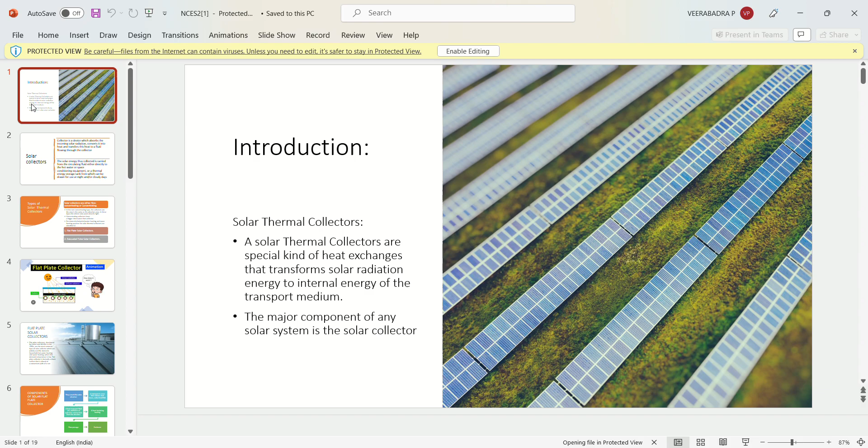Introduction about solar thermal collectors. Solar thermal collectors are special kind of heat exchangers that transform solar radiation energy to internal energy of the transport medium. The major component of any solar system is the solar collector. A collector is a device which absorbs the incoming solar radiation and converts it into heat, transferring this heat to a fluid flowing through the collectors. The solar energy thus collected is carried from the circulating fluid either directly to the hot water or space conditioning equipment, or to a thermal energy storage tank from which it can be drawn for use at night or on cloudy days.

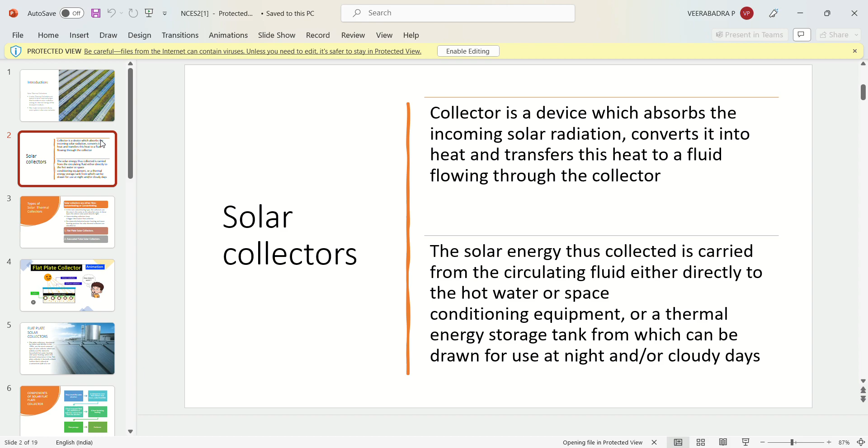Types of solar thermal collectors. Solar collectors are either non-concentrating or concentrating. In the non-concentrating type, the collector area is the same as the absorber area. In these types, the whole solar panel absorbs light.

Concentrating collectors have a bigger interceptor than collector area. For domestic or industrial water heating and space heating purposes, solar thermal collectors are classified as flat plate solar collectors and evacuated tube solar collectors.

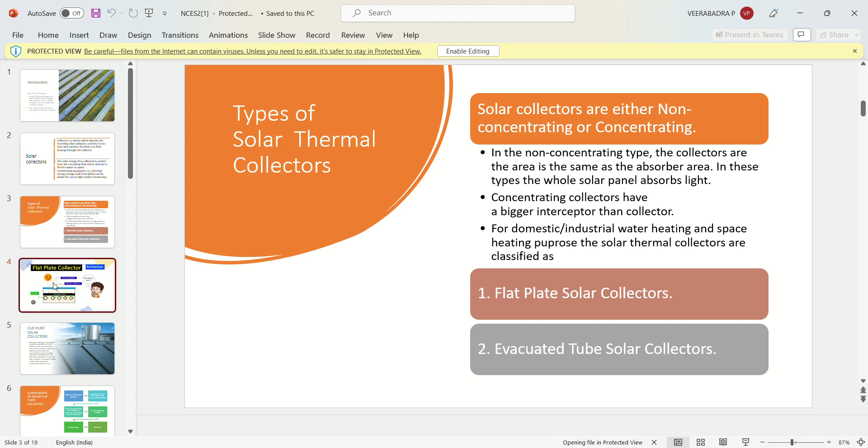We can see the flat plate collectors and how they work. They absorb the radiations, both direct radiations and diffuse radiations. We can see the tubes, absorber plates and tubes.

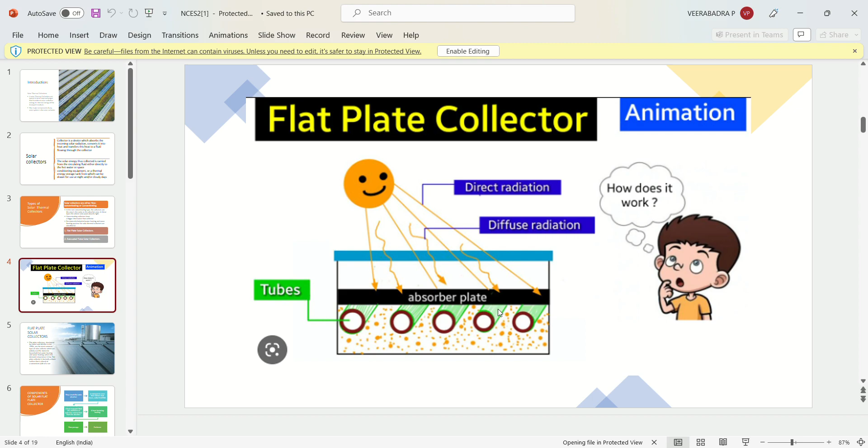Flat plate solar collectors, developed by Hottel and Whillier in the 1950s, are the most common type of solar collector, widely used for domestic household hot water heating and space heating where the demand temperature is low. A flat plate collector is basically a black surface that is placed in the convenient path of the sun.

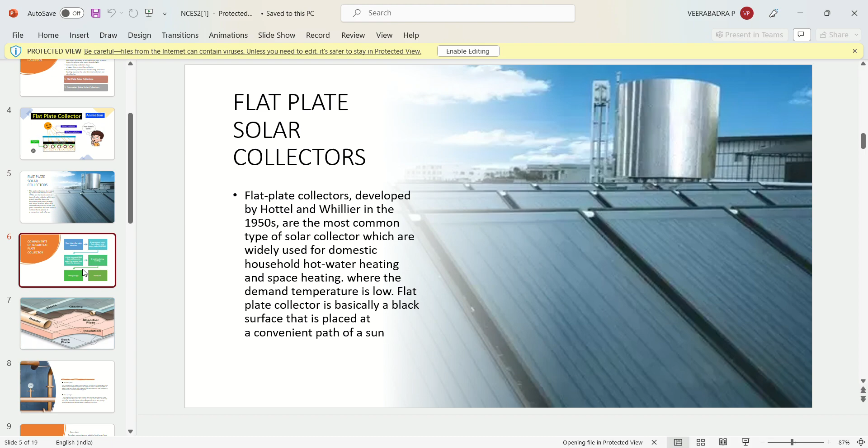Components of solar flat plate collectors: a dark flat plate absorber, a transparent cover that reduces heat loss called glazing, a heat transport fluid (air, antifreeze, or water) to remove heat from the absorber, heat insulating backing, and flow passage enclosure.

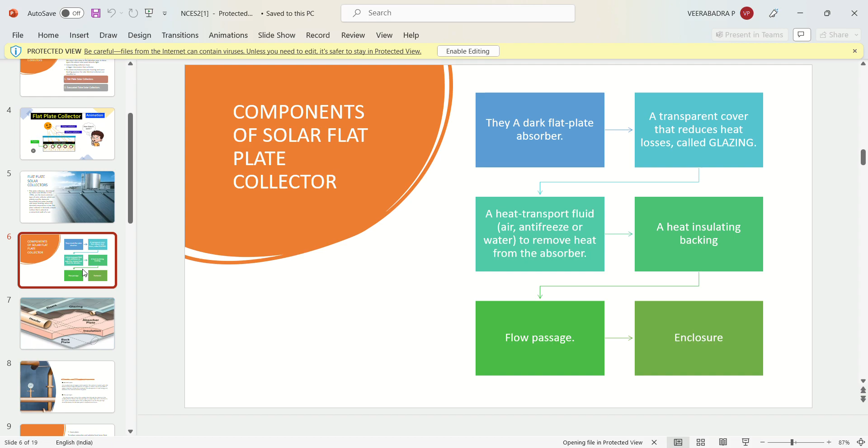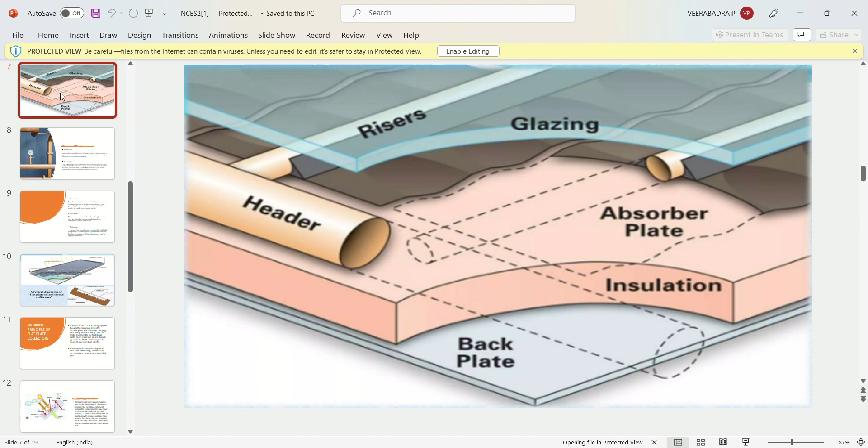Absorber plate: it is usually made of copper, steel, or plastic. The surface is covered with flat black material of high absorbance. If copper or steel is used, it is possible to apply a selective coating that maximizes the absorption of solar energy and minimizes the radiation emitted by the plate.

Flow passages conduct the working fluid throughout the collectors. If the working fluid is a liquid, the flow passage is usually a tube that is attached to or is a part of the absorber plate. If the working fluid is air, the flow passage should be below the absorber plate to minimize heat losses.

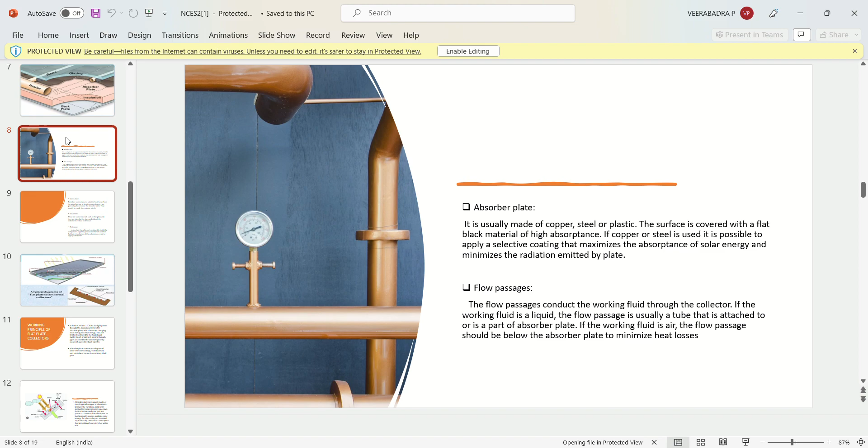Cover plate reduces convective and radiative heat losses from the absorber. One or two transparent covers are generally placed above the absorber plate, usually made from glass or plastic. Insulation materials such as fiberglass are placed at the back and sides of the collector to reduce heat losses. The enclosure is a box in which the collector is enclosed; it holds the components together, protects them from weather, and facilitates installation of the collector on a roof or appropriate frame.

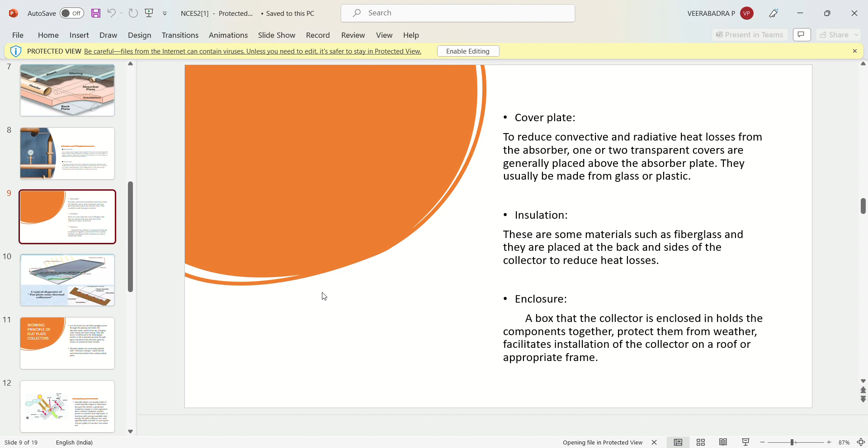The working principle of flat plate collectors: sunlight passes through the glazing and strikes the absorber plate, which heats up, changing solar energy into heat energy. The heat is then transferred to the fluid - liquid, water, oil, or gas - passing through pipes attached to the absorber plate by means of convective heat transfer.

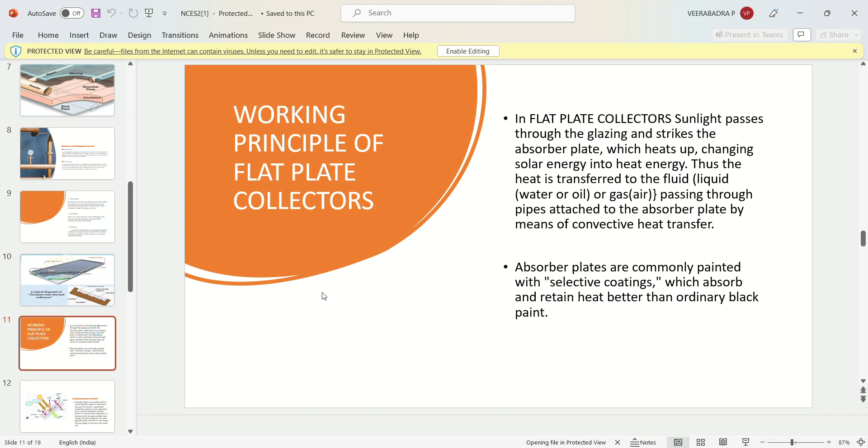Absorber plates are commonly painted with a selective coating which absorbs and retains heat better than ordinary black paint. They are usually made of metal, typically copper or aluminum, because metal is a good heat conductor. Copper is more expensive, but it is a better conductor and less prone to corrosion than aluminum. In locations with average available solar energy, flat plate collectors are sized approximately 1/2 to 1 square foot per gallon of one day's hot water use.

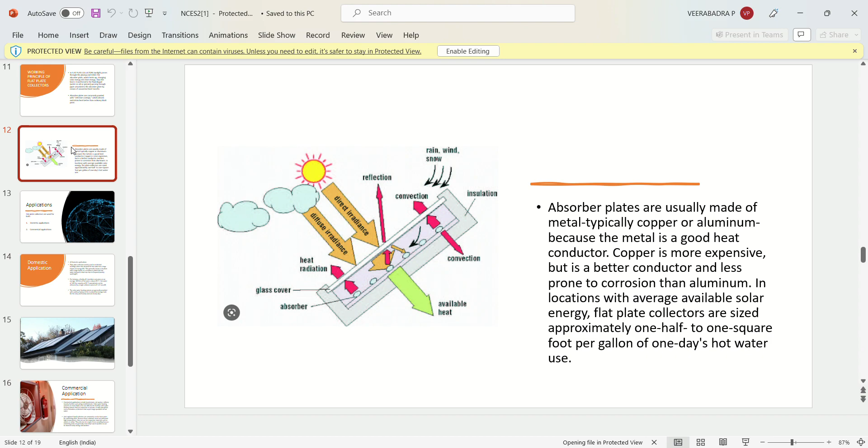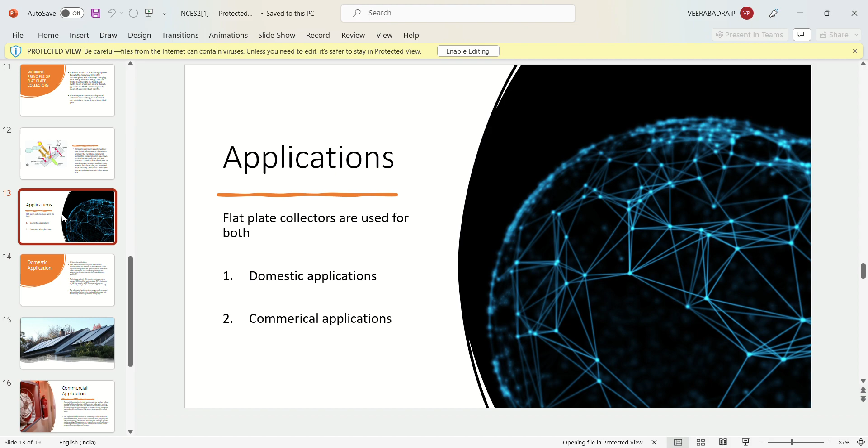Applications: flat plate collectors are used for both domestic applications and commercial applications.

Domestic applications: flat plate collectors are mainly used in residential buildings where the demand for hot water has a large impact on energy bills. This generally means a situation with a large family, or a situation in which hot water demand is high due to frequent laundry washing. For instance, a family of 4 members consumes an average of 100 liters of hot water a day at 60 Celsius. This hot water capacity can be delivered by a single collector system of 2 square meter area.

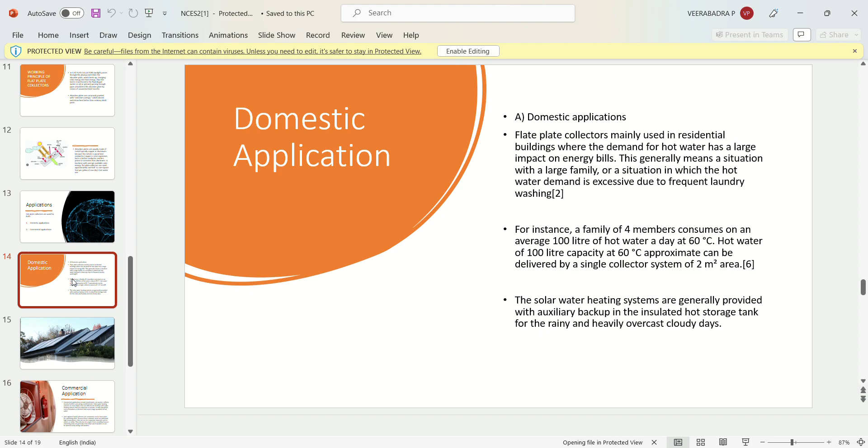Solar water heating systems are generally provided with an auxiliary backup in the insulated hot storage tank for rainy and heavily overcast cloudy days. We can see an image of applications - this is an image of a domestic application, showing how we can use domestic applications.

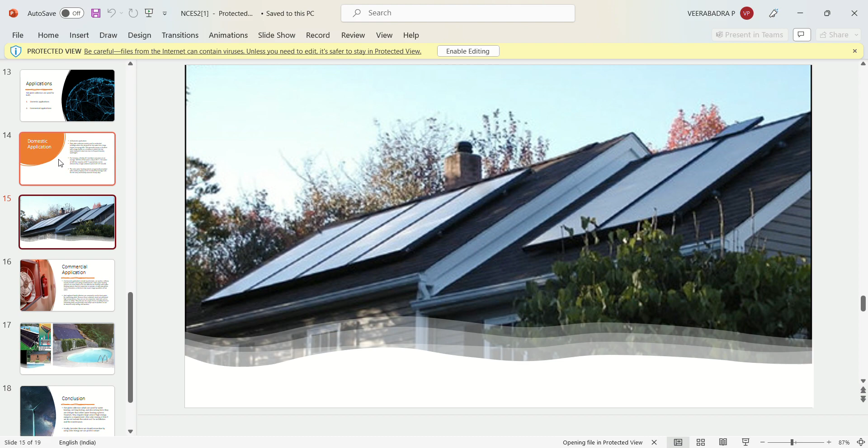What is a commercial application? Commercial applications include laundromats or car washes, military laundry facilities, and eating establishments. Solar water heating systems are most likely to be cost effective for facilities with water heating systems that are expensive to operate, with operations such as laundries or kitchens that require large quantities of hot water.

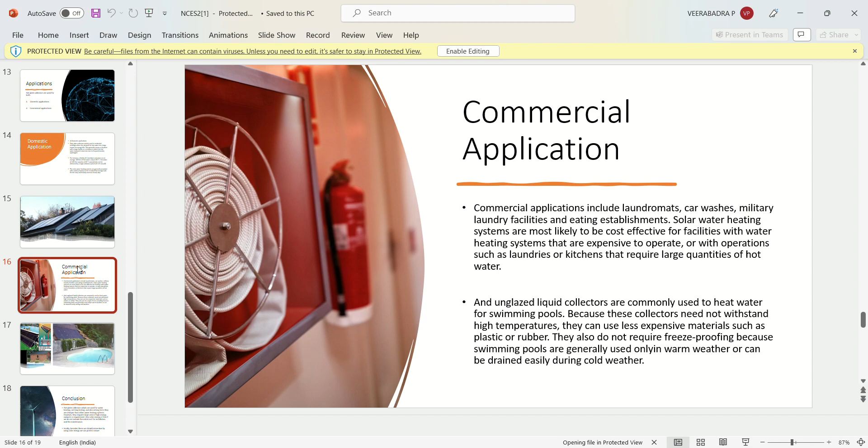Collectors are commonly used to heat water for swimming pools. Because these collectors need not withstand high temperatures, they can use less expensive materials such as plastic or rubber. They also do not require freeze-proofing because swimming pools are generally used only in warm weather or can be drained easily during cold weather. This is an image of how we can use commercial applications.

Conclusion: flat plate collectors, which are used for water heating, are long lasting and also, in the long term, cheaper than other water heating systems. However, they require a large area if high energy output is required. Also, solar energy is free if we do not include the initial cost of installation and maintenance. Finally, besides this, we should remember that by using solar energy we can protect nature.

This is the topic we are discussing today: flat plate collectors.